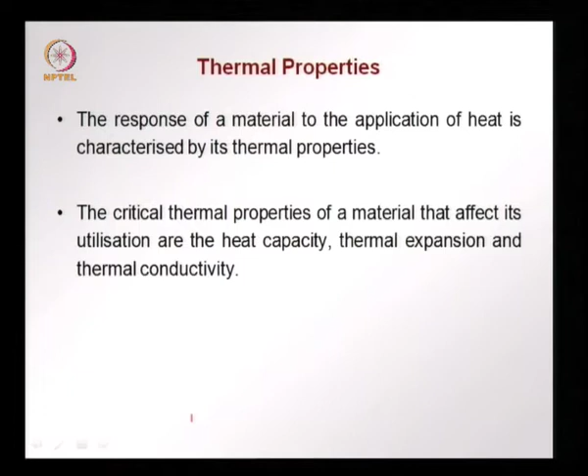Heat capacity or specific heat is related to the amount of heat energy required to raise the temperature of a material by 1 degree; that is what is called the heat capacity. This indicates the ability of the material to absorb heat from its surroundings, how much heat it can absorb as its temperature goes up. The specific heat is the heat capacity of a material per unit mass, and its units are given as joules per kilogram Kelvin or calories per gram Kelvin.

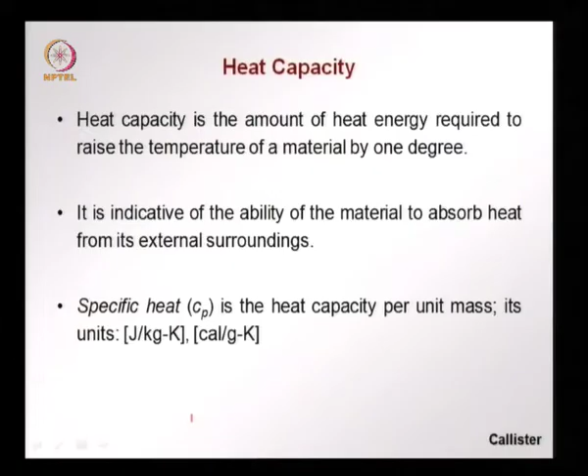How this heat is absorbed and stored is of interest to us when looking at development and understanding of materials. In most solids, the principal mode of absorption of heat or thermal energy is by the increase in vibrational energy of the atoms. Normally the atoms would be in a certain lattice position, denoted by these purple circles as the normal lattice position. When heat is absorbed, these atoms start vibrating and can take a displaced position, shown by the blue dots, which keep varying due to the vibrations.

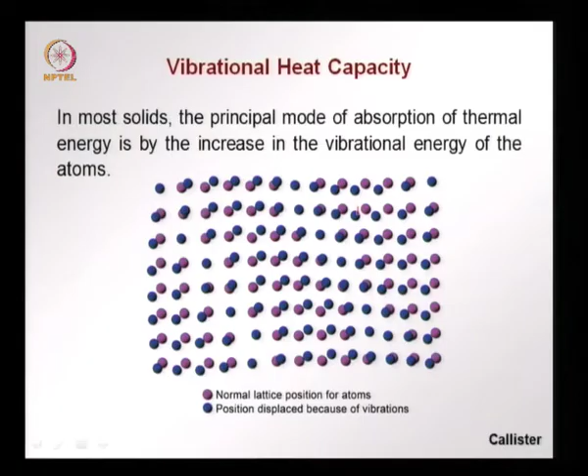Another aspect of thermal behavior which is also important to us is expansion. Most solids will expand when heated and contract when cooled; this is generally the case.

The change in length with temperature can be given by this equation. Delta L, the change in length induced by the change in temperature, divided by the original length, gives a thermal strain epsilon Th, which is given as alpha L, the linear coefficient of expansion, times the change in temperature. So the strain induced by a change in temperature is proportional to the temperature change, and the factor of proportionality is called the coefficient of expansion, which varies from material to material.

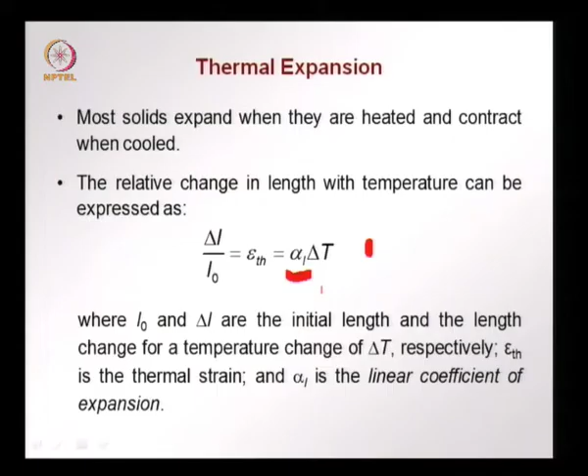Volumetric changes in temperature can be represented in this form, where delta V is the change in volume due to the temperature increase; the material expands by a certain volume delta V. The ratio between this delta V and the original volume V0 is equal to alpha V times delta T. Alpha V is the volumetric coefficient of thermal expansion, giving the proportionality between volumetric strain and the change in temperature. For an isotropic material, alpha V is equal to 3 times alpha L, so knowing the linear coefficient of thermal expansion, we can find the volumetric coefficient of thermal expansion.

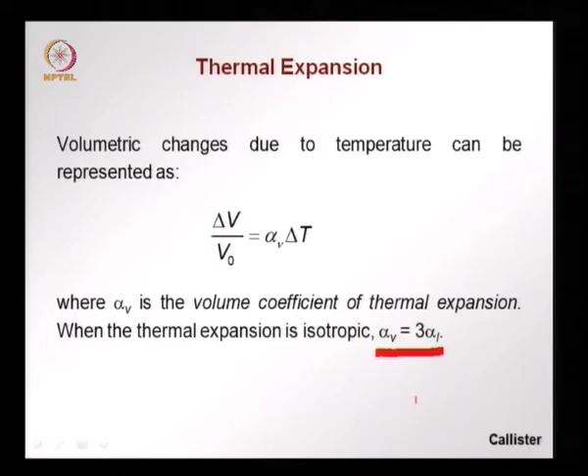Now, why does thermal expansion occur? This goes back to our discussion of the Condon-Morse diagram. We saw that in the valley where the material lattice structure is stable, the minimum value of potential energy, or the maximum attractive energy, corresponds to a spacing R0, and this only occurs at 0 Kelvin, absolute zero temperature. Above this temperature, at all normal temperatures, there is a possibility that the spacing can be anything over a certain range.

Say instead of 0 Kelvin, we are at a certain temperature here. At this temperature, corresponding to this potential energy or vibrational energy, there can be different interatomic positions which have the same energy. So what the atoms do is vibrate over this range of interatomic spacing, and the average distance would be the mean of this. In this case it would be this point R3, corresponding to the vibrational or potential energy E3.

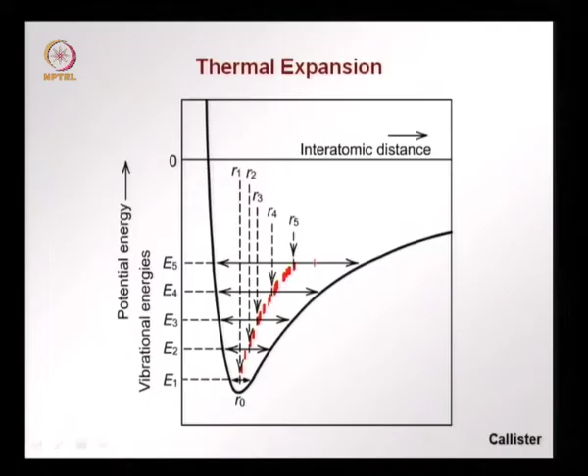So thermal expansion arises due to the increase in interatomic spacing as the potential energy increases. In the curve between potential energy and interatomic spacing, the minimum energy corresponds to 0 degrees Kelvin, where the interatomic spacing is R0. For any other temperature, as temperature increases, the vibrational energy and potential energy increase, and the average vibrational amplitude corresponds to the well width, that is the range on two sides of the well at that energy level. So the amplitude of the vibration is this.

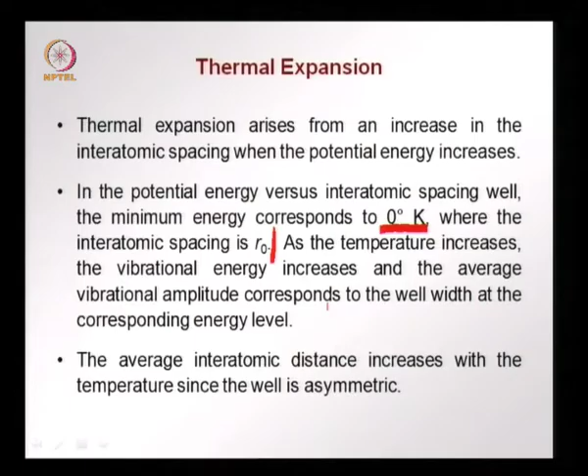This is called the amplitude of the vibration. The average interatomic distance, that is the midpoint of the well width, increases with temperature since the well is asymmetric, as I showed you before. So as this average distance increases, the material experiences expansion.

In the case of metals, the alpha L value, or linear coefficient of expansion, normally varies from 5 to 25 times 10 to power minus 6 per degree Celsius. There are some alloys with much lower coefficients of expansion, such as iron-nickel, iron-cobalt alloys, with alpha L values on the order of 1 times 10 to power minus 6 per degree Celsius.

Ceramics generally have a slightly lower thermal expansion coefficient. Strongly bonded ceramics have values in the range of 0.5 to 15 times 10 to power minus 6 per degree Celsius. At the lower end we have materials such as fused silica glass, which has a very low atomic packing density.

So even when the vibration occurs, we do not see any significant increase in volume. Due to the low atomic packing density, the interatomic expansion produces very little macroscopic dimensional change, that is, in the material we do not see a lot of dimensional change even though the temperature is increasing. So we have a low coefficient of expansion.

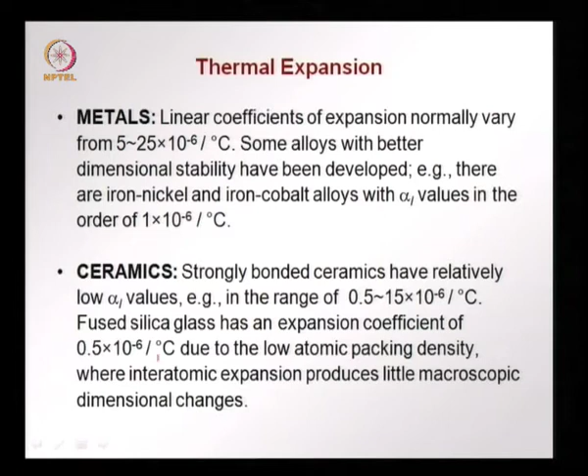On the other hand, polymers generally have high expansion coefficients, in the range of 50 to 300 times 10 to power minus 6, sometimes one order higher than what we saw in ceramics and metals. The highest expansion is seen in linear and branched polymers. If you remember, these are the polymers which have van der Waals bonds between the chains, these are weak bonds, and we do not have covalent bonds between the chains.

There we have higher expansion, whereas in cross-linked polymers, with increasing cross-linking the expansion coefficient decreases, that is, there is less thermal expansion when the cross-linking is stronger. In thermoset network polymers we have the least thermal expansion occurring, where you have strong covalent bonds between the different molecules and a stiff network structure.

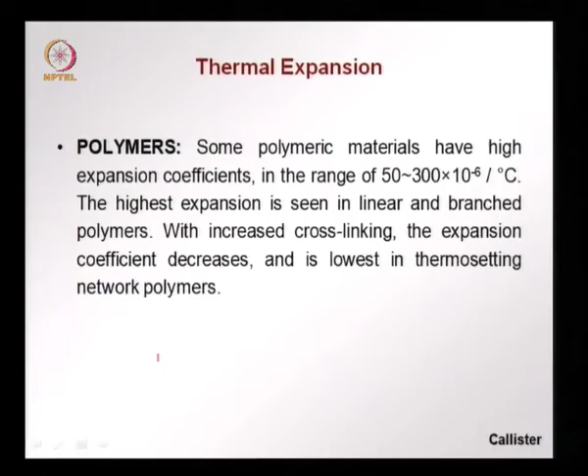Now, when we discussed the Condon-Morse diagram, we said that when the bond strength is larger, the melting point is also higher, because the energy needed to break the bond is higher and increases with the strength of the bond. We also saw that when the Condon-Morse diagram had a narrower and deeper well, that is for a stronger bond, the narrower well width gave rise to less variation of the average interatomic spacing at different temperatures, meaning the thermal expansion was also less. So when we have strong bonds, we have a higher melting point and also a lower thermal expansion.

This is what you see here on the curve on the left. We have different metals, and on the x-axis we have the melting temperature, so a higher melting temperature indicates a higher bond strength. On the y-axis we have the coefficient of thermal expansion, and again a higher bond strength means the coefficient of expansion is lower. You see a range of metals which fall on this line, so clearly we see that as the melting temperature increases due to higher bond strength, we have a lower thermal expansion.

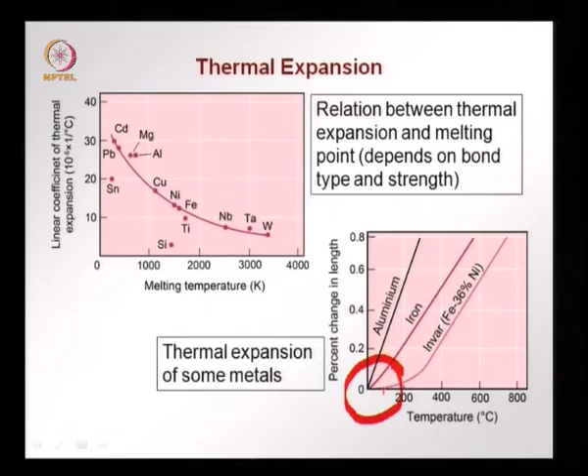That is why we use Invar as a reference in calibration when we want in the lab to measure change of strains or deformations over a period of time. From one day to the other we can have a different ambient temperature, but we always want the same reference. So calibration is done with reference to an Invar bar, which we know that over normal temperatures, even though the temperature is changing, will not change its length. So that is an application of Invar, and this is one of the few alloys which do not have any significant thermal expansion over a wide range of temperatures.

One aspect of interest to us is that there are thermal stresses which can develop due to thermal expansion. Whenever thermal expansion is restrained, there is thermal stress developed. So you can imagine a bar of steel increasing in temperature will tend to become longer, but if we had the ends fixed and not allowed to move, this thermal expansion now will create a stress in the material because the free strain is stopped. The material cannot lengthen due to its end restraints, and this resistance to deformation causes a stress in the material.

Sometimes this stress is so high that the material breaks or fails, or it can cause failure in the material that is supporting it or fixing it. So in many cases we have to worry about these thermal stresses that can build up in a structure, and in some cases when we combine materials, for example reinforced concrete, combining steel and concrete, we choose combinations with the same thermal expansion, so that the restraint or differential thermal expansion does not give rise to thermal stresses, or induce very high thermal stresses in any structural element that can cause failure.

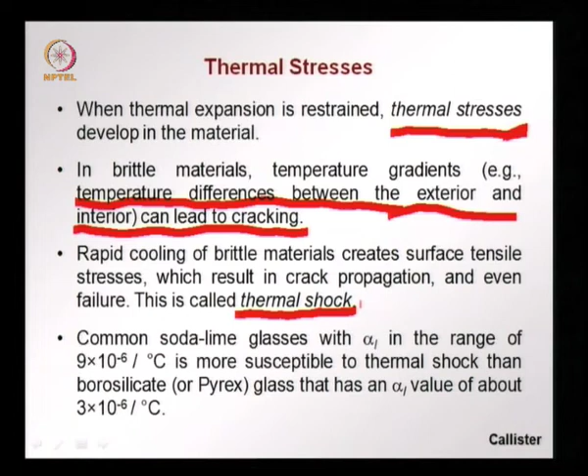The third thermal property which is of interest to us is thermal conductivity. Thermal conductivity is due to the phenomena by which heat moves from high to low temperature regions through a material. That is, the material transfers heat, and this ability is called thermal conductivity.

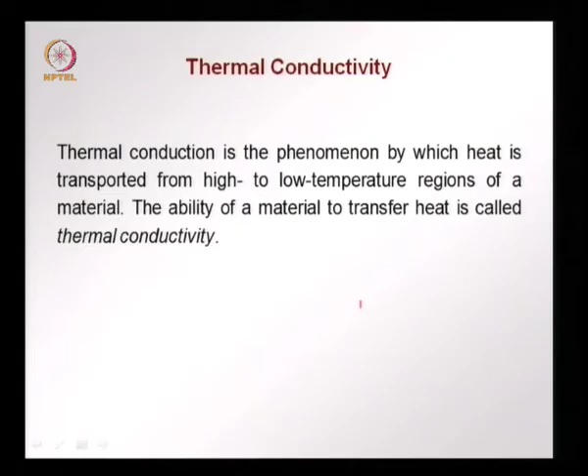Thermal conductivity can be defined by this expression, where Q is the heat flux or heat flow. This is equal to minus K, K is the thermal conductivity, it is a material property, times the temperature gradient, dt by dx, which is the rate of change of temperature. The units for Q and K are watts per meter square and watt per meter Kelvin. So these are the units of K and Q.

Now this heat is conducted by the lattice vibration that we looked at when we looked at absorption of heat also. The same mechanism also transports heat through a material. Lattice vibration and the free electrons, say in the case of a metal bond, facilitate the transfer of heat through the solid. So the heat moves through the solid due to the vibration of the lattice and the free electrons that are present in the lattice structure.

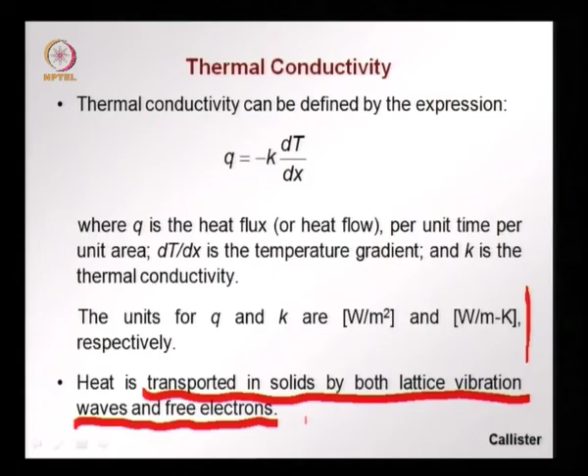Thermal conductivity varies significantly between materials. Say in the case of copper with a conductivity of 401 watt per meter degree Celsius, we can have a case that we have, say, a panel. On one side the temperature is 30 degrees, the other side the temperature is 20 degrees, and the thickness is about 1 meter. This would be the rate of thermal conductivity or heat transfer.

In the case of silicon, a similar element, silicon has a much lower thermal conductivity, we see that the heat passes less.

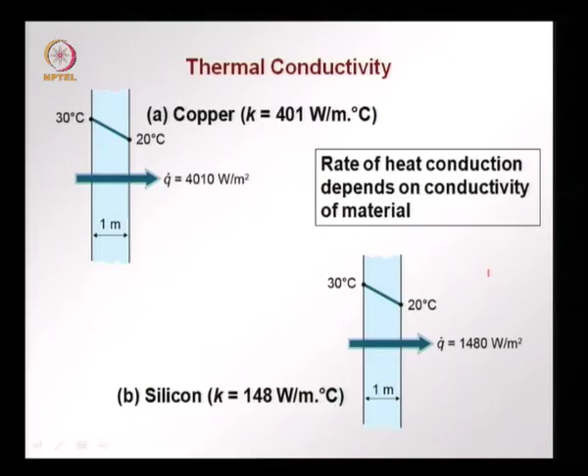Most of our civil engineering applications, say in buildings, we want lower thermal conductivity in our walls and the shell and the envelope that makes up a building, because we do not want to be influenced too much by the temperature changes outside a building or the structure that we live in. So we want something that insulates, which behaves in a manner closer to silicon rather than copper, with less heat coming in if you have a very hot climate outside, or less heat going out if you have a very cold temperature outside. This rate of heat conduction depends on the conductivity of the material, and this influences the thermal comfort in the area that we are living in or working in.

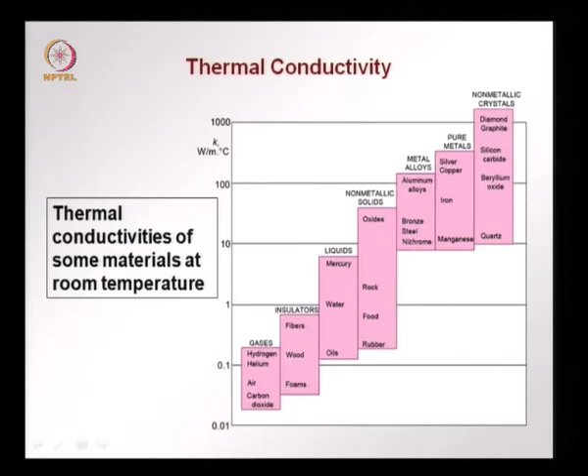These are good conductors, whereas these are good insulators.

What are the ranges of thermal conductivities? In metals we have a range of 20 to 400 watt per meter Kelvin.

Generally we find that alloying metals with impurities tends to decrease the thermal conductivity, as we see in this case in the copper zinc alloy and also in stainless steel.

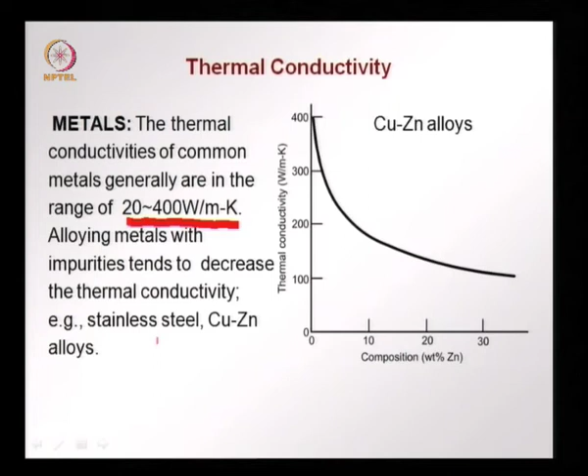In polymers, the thermal conductivities are in the order of 0.3 watt per meter Kelvin, and here the heat transfer is realized by the vibration of the molecules and the rotation of the chain molecules. You remember in polymers we said that the polymer chains have a high degree of rotation, movement without the chains being broken, and this ability to rotate and vibrate facilitates the heat transfer.

A polymer with higher degree of crystallinity, that is a more ordered, more arranged structure, will have higher conductivity than an equivalent amorphous material which has a lot of space between the chains. In the case of higher degree of crystallinity, we have better packing, and therefore the conductivity is better. Many polymers are also good thermal insulators, again because of the amorphous nature and the lack of packing.

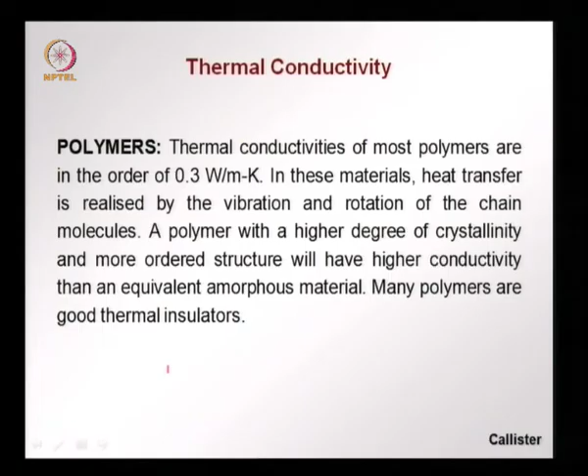In ceramics, we find that thermal conductivity has a wide range, say in the range of 2 to 50 watt per meter Kelvin. Glasses and some amorphous ceramics have lower conductivity than crystalline ceramics, again as the packing increases, conductivity becomes better. The porosity also influences the conductivity significantly.

Since the thermal conductivity of gases is very low, like the thermal conductivity of air is only about 0.02 watt per meter Kelvin, and in the pores of these ceramics we have air which is not facilitating the conductivity.

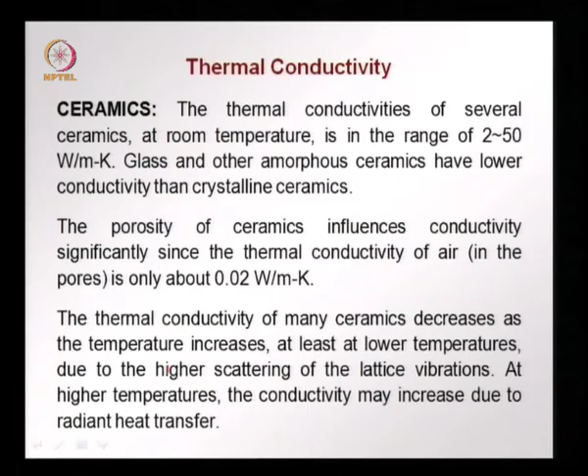Thermal conductivity of ceramics also decreases or can decrease as the temperature increases, at least at lower temperatures, due to the scattering of the lattice vibrations. At higher temperatures, conductivity may increase due to radiant heat transfer. Instead of conductivity through lattice vibration, heat could be transferred by radiation.

So here you see how thermal conductivity changes in some materials as a function of temperature. You can see in the case of a dense stabilized zirconia, you have an increase in the thermal conductivity as the temperature increases. In other cases you have a drop and then the effect of radiation coming in, and there is an increase in the thermal conductivity.

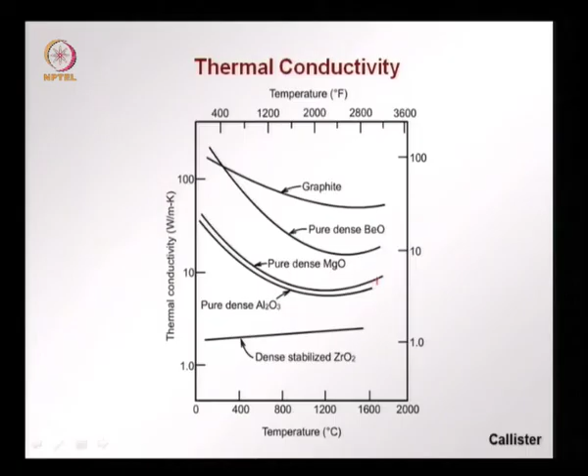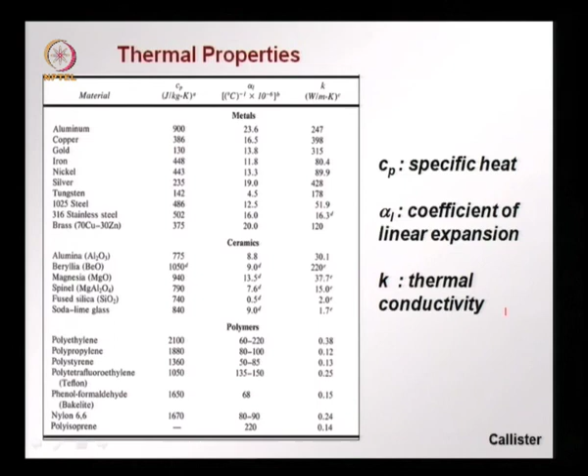So to conclude, we have looked at the thermal properties that are important to us in civil engineering applications of different materials, and this concludes this module on properties. We have looked at mechanical properties, we have looked at rheological properties, and now we have looked at thermal properties. We went to properties after looking at the microstructure, how the material develops, and we looked at the range of structures that form in materials on the basis of the bonds that form at the molecular scale, and then that led on for us to understand why materials behave in a certain way when stress is applied and when temperature is applied. Now, after this we will go on to look at individual materials, and we will try to review these properties as we go through these materials, and we look at where the different materials are used and in what applications. Thank you.